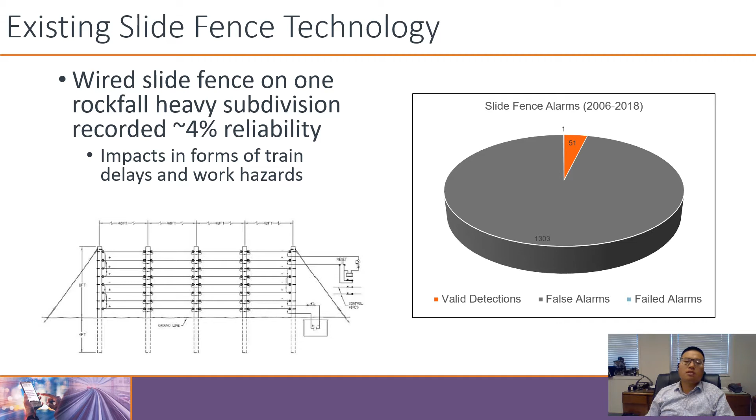So this is the LiDAR slide fence that was installed about 30 minutes just east of Portland, out there along the Columbia River Gorge. Beautiful area out there. The scanners are mounted roughly every 60 feet on existing wooden poles that already hold the wire slide fence. Each scanner monitors about 120 feet, so we're looking at 60 feet on either side of the scanner. And it's mounted about 2 feet above top of rail, so it is imposing a horizontal detection plane above the top of rail.

We have redundancy across the entire slide fence system, so every single area of track is constantly monitored by 2 scanners, such that if one scanner detects an intrusion, it will send an alarm to our controller. And all 10 scanners talk to a vital logic controller, and that is what we use to process the alarms and indicate to the train control systems.

Again, redundancy is maintained along the entirety of the slide fence. So the last 2 scanners are configured so that it's only monitoring half of what the other scanners are, so the 60 feet that it is sharing with its adjacent scanner. Each scanner is also housed in a metallic shroud just to protect the scanner from damage from kicking rock or debris. And it also has a motorized shutter that is raised when a train is passing through the area.

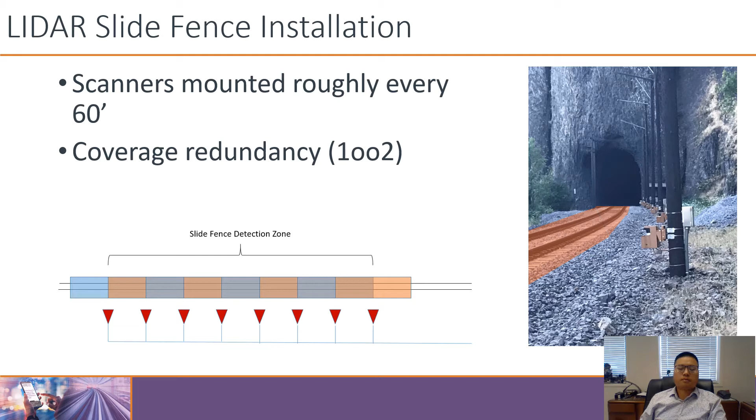So they say seeing is believing, and that is very true. That is why our first test site for this LiDAR slide fence was developed in an area where we already had an existing slide fence. We had camera systems set up to capture a rockfall event, and our controllers were wired together so that we would be able to determine if the LiDAR slide fence had activated when the wired slide fence activated and vice versa.

Well, after we constructed the site and started digging into our numbers for historical slide fence activations, we found that for a test site of our size, we will only expect to see 1 to 2 rocks every 10 years. So we decided it probably wasn't the most productive use of anybody's time to wait 10 years for a single rock to drop. Well, if you can't see it, what's the next best thing? For us, that's the safety process.

So as a COTS integrator, your safety process will revolve around 2 items. The first one being the PSP. That is the bread and butter of the subpart H process. That is spelled out in 236.907. It lists 20 or so items that your product safety plan must address. But along with that is your RSPP, so your Railroad Safety Program Plan. That is spelled out in 236.903.

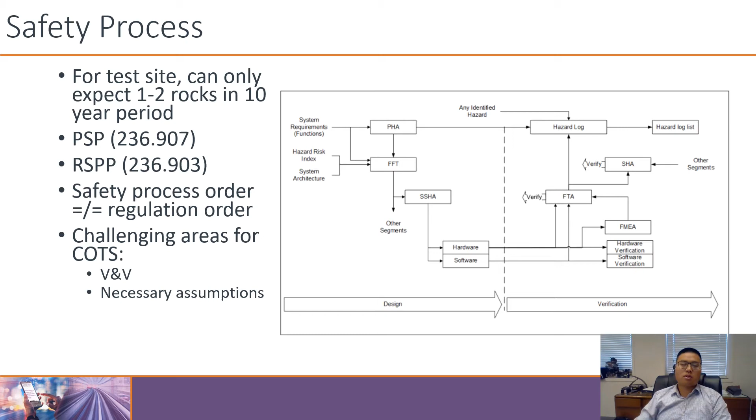Risk assessment is the meat and potatoes of the safety process. From a COTS perspective, there are three main parts that you must consider. The first one is the basic requirement, and that is spelled out in 236-909, and that is your minimum performance standard per subpart H. A basic summary of it is that your mean time to hazardous event of the proposed system must be greater than or equal to the mean time to hazardous event of the existing system.

And that goes for about anything, right? For any new technology, as stated previously, for it to be viable, it must be at least as good, if not better, than the existing. In order to determine these mean time to hazardous event values, fault trees are your friends. In this case, there are two fault trees that at a minimum you will need to make.

The first is the functional fault tree. The functional fault tree will allow you to determine the minimum safety level that the existing system is at, and that will become the basis for your new system based off of the COTS equipment. After you've conducted all your design and your V&V activities, you will then rebuild that fault tree with the known values into a fault tree that's built similar to the functional fault tree, but we call that the fault tree analysis.

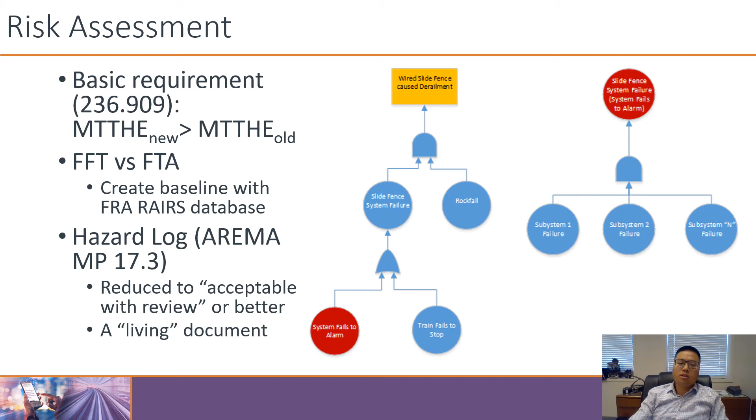So again, this hazard log is a living document. Every design process that is undertaken gets tracked within this hazard log. In our specific case, we had everything logged, from electromagnetic compatibility to just sharp corners. Anything that can become a safety critical hazard will need to be recorded and reduced to acceptable with review or better. Your AREMA manual part 17-3 does a really good job of explaining the requirements and objectives of a hazard log.

As a result of the safety process, we had to make a few minor tweaks to our original design. And the safety process also confirmed for us that some of the features we were adding initially have become a very critical piece of our safety case. So the first thing that we added within the design is a loitering time. The scanners were very susceptible to false alarms caused by wild animal intrusions or even pedestrian traffic. This particular area was rife with trespassers and animals alike.

So we implemented a loitering time, and that is a predetermined time that we set into the controller, requiring the scanner to detect the object for that amount of time before sending an indication to our logic controller. So for example, if we set it to 10 seconds, the object has to be still for 10 seconds within that detection plane before we get an alarm.

The second thing that we confirmed was that redundancy was an absolutely critical piece of our safety case. Earlier on, once we realized that we had to overestimate on the software V&V side, it gave us a mean time hazardous event calculation that would have not met our functional fault tree goals if we did not employ redundant scanners. So again, this became a very critical piece of our final design.

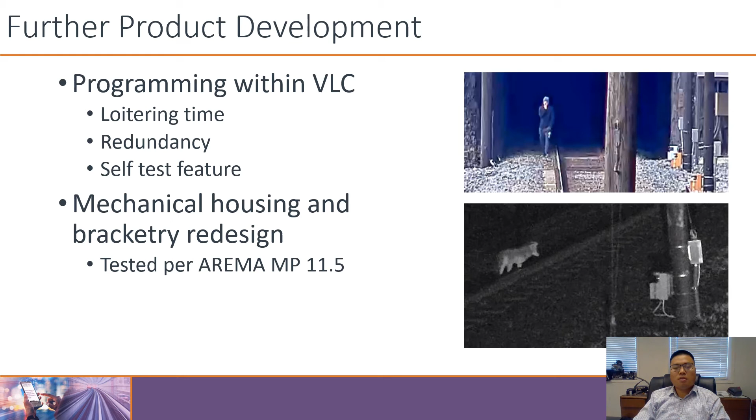I'd like to talk to you today a little bit more about the LiDAR system itself, how it works, and how we take our decades of experience of safety accredited LiDAR systems from the European environment into the FRA regulated application within US Class 1 railways and general US railways.

So to give you an idea of how LiDAR works, if you look at the video in the bottom right hand corner here, you'll see a LiDAR system side by side with its visual counterpart. And you can see as people and vehicles transit across our grade crossing here, the LiDAR is picking up the boundaries of their legs, the sides of cars, and is very capable of detecting accurately where these objects are at any given time during times of specific interest to monitor obstacles, either on grade crossings or, in the case of rockfall, rocks on tracks.

So the LiDAR works by scanning a very narrow pencil beam of infrared irradiation over a 100-foot arc up to 190 degrees total extent. And from this data we can very accurately measure whether an obstacle is sitting within an area of interest or a danger area within either grade crossings or, in the case of rockfall, on the track beds or within the area of the track ties, specifically that cause a risk to derailment or other damage to the train system itself.

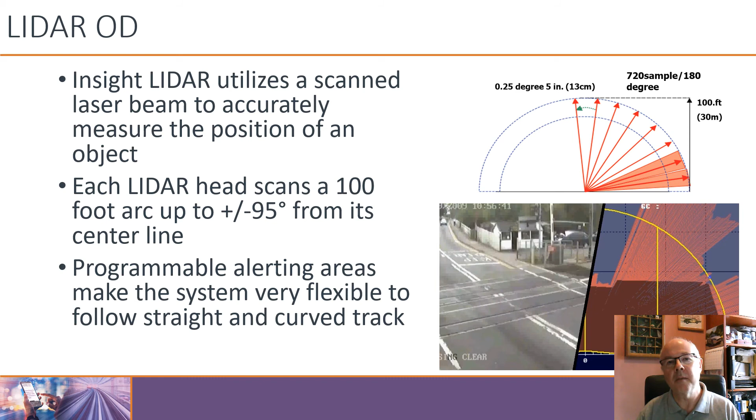So how do we take what we have previously used very successfully in Europe into the United States as an application? Well, over in Europe and most of the rest of the world, we abide by standards and processes that are defined by CENELEC's Safety Integrity Levels definition system. And we particularly employ SIL levels of 3 and 4 for sensor activities that tie directly into safety critical systems such as level crossings and signalling.

The applications themselves differ slightly from FRA approval, but fundamentally contain the same level of information and requirements for reducing the probability of failure by careful design and planning and use and implementation of the systems themselves. What this means is we can directly take the information garnered for a SIL 3 approval. For example, our LiDARs are now being approved in Deutsche Bahn for SIL 3 grade crossing monitoring, and use that documentation, the evidence and the calculations on probability of failure, the MTBFs, the MTTFs, and the subsequent operability and availability of the system to directly support the application for an FRA PSP approval to Subpart H.

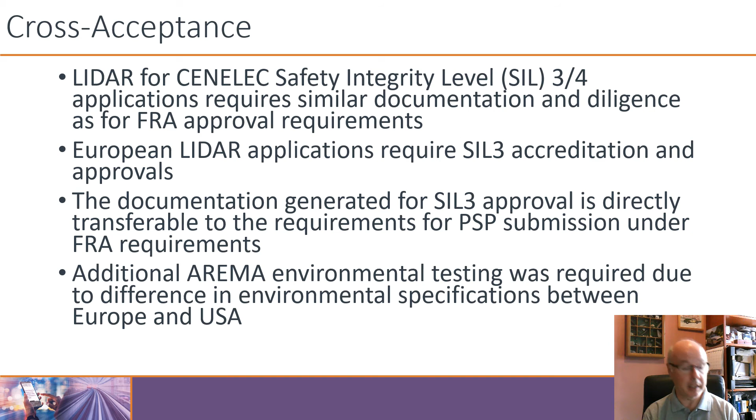So what do we mean by the comparison of levels of safety between the SIL 3 certification process and the FRA Subpart H PSP approval process? Well, for a continuous operation use like Rockfall, which monitors 24/7, 365 days a year, we're looking at taking our existing SIL 3 accredited system, which operates with a PFD range of 10 to the minus 7, 10 to the minus 8 probability of critical failure of the system, and compare it with the remote section D in the AREMA probability limits, which commensurately is about 10 to the minus 7 to 10 to the minus 9.

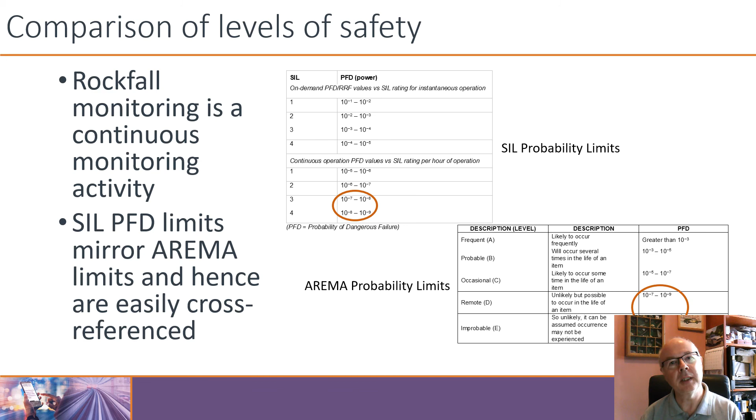The beauty of this interchangeability of the information is that whatever we do in Europe under SIL 3 regime can be applied to whatever requirements exist in the USA. And the beauty of it is whatever we do in the USA can then be taken back into the European environment and subsequently used for new applications of our equipment under a SIL 3 application. And a good example of this is Rockfall, where we took our standard high integrity grade crossing monitoring system and applied it to a length of track that was susceptible to rockfall.